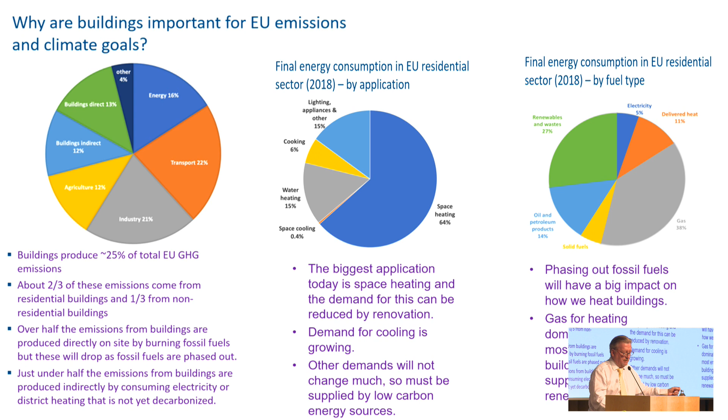But broadly speaking, there's a huge opportunity for reduction. That reduction can be readily met by electrification and particularly by the adoption of heat pumps and district heating. So there's wide opportunities to seriously address the emissions from buildings. Essentially, what it's trying to do is reduce the emissions from the building itself, decarbonise the building. That is by introducing measures that are going to reduce the heat loss, perhaps increase the solar gain, store some of the heat and electricity that's generated perhaps by solar panels, solar thermal, photovoltaic systems on the building, so that the building is able to reduce the amount of energy it consumes and export energy into district heating networks or to the grid.

So you're decarbonising at the demand side in the building itself. That also, by the way, requires a market that enables that demand side energy sales to be enacted. So your building occupants move from being consumers of energy to also producers of energy, so-called prosumers. And that's another side of it in terms of whether that market actually exists so that those transactions

can take place. The other thing that needs to happen is that the residual electricity to meet those heat pumps, for example, that comes to the building, is met from decarbonised sources, is met from renewable energy primarily, although if you regard nuclear as a decarbonised sustainable source, it could be met from nuclear. And

that needs to increase substantially, and actually needs to increase substantially over the amount of electricity in total that's currently generated. Because you're also seeking to decarbonise industry, you're seeking to decarbonise transport, so electric vehicles. So there's a lot of other demands on decarbonised electricity.

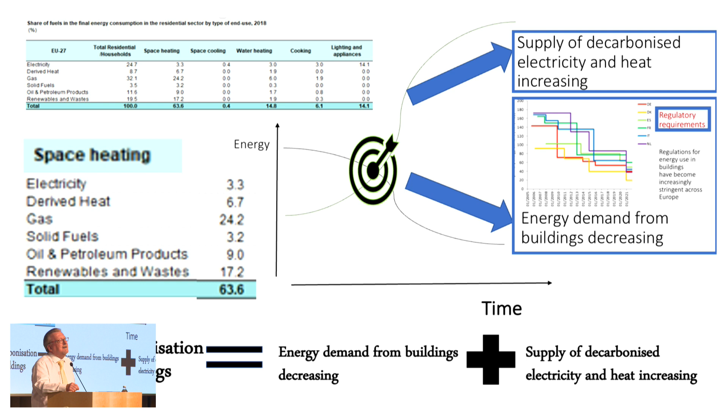side. Also, there tend to be, in many systems, entrenched actors who want to maintain their market positions, so that you discussed earlier on, for example, the people who maybe want to bring hydrogen into a domestic building situation. In my view, a completely mad idea. But the idea is because the gas industry saw the electricity industry became vectors for renewables and saw an opportunity for themselves to occupy a similar market position. So incumbent actors also influence the reality of how these things get played out.

So essentially, you'll reduce the energy demand, and you can see a little graph on my insert there of how actually building regulations for new buildings have gone down over the years and have tighter and tighter requirements, and supply decarbonised electricity, decarbonised heat from district heating to those buildings as the combined strategy that needs to be adopted.

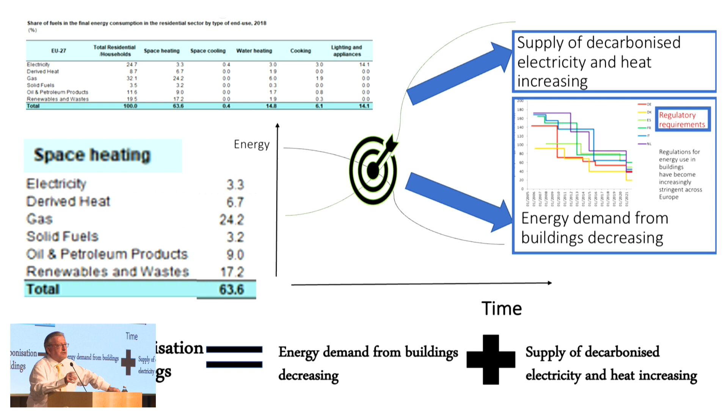And this is part of a long journey, and I'm grateful for this particular paper this year, a paper by Tirelli and Besana, which summarised, if you like, the trajectory of how things are going to change in buildings, and also some of the nomenclature, from business as usual to nearly zero energy buildings, zero energy buildings, net zero carbon buildings, carbon negative buildings, and absolute zero carbon buildings.

And I don't want to get tied up in all that terminology, but they're basically stages on a journey in which buildings move from being just supplied with energy to meet loads that aren't particularly controlled, to being net carbon sinks. And that is possible in certain climatic conditions in certain types of buildings. Not, I should stress, for individual buildings in all climates. So there's a kind of journey.

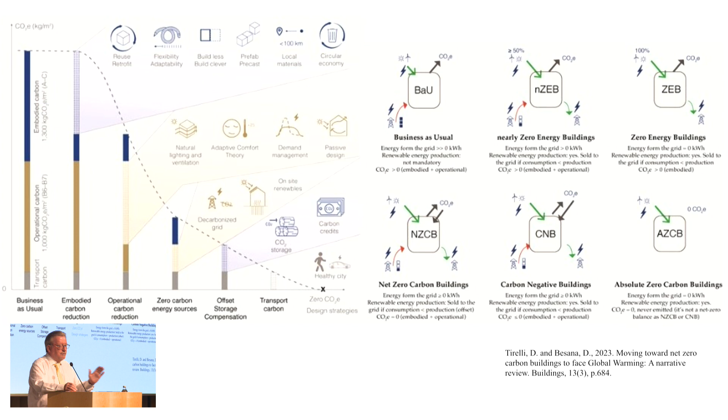So we look at just a little bit more detail at maybe the first stage of that journey, the net zero energy building. And this simply is a building which has reduced its energy load, but has solar thermal, PV. It may have a heat pump, for example, that can be part of a district heat network.

So when it is producing energy from the heat pump, but it's not being used in the building, it can go into that network. Or indeed, if it's a historic building, it may be actually drawing heat from a district heating network, which might have solar thermal, geothermal, heat pumps, etc., all linked to a network. So at certain times, it requires energy. At other times, it will be sending out energy to the grid.

The illustrations on this slide are terrific for me. These are new net zero energy buildings.

Is that achieving a low energy building is architecturally neutral. It doesn't imply any kind of architectural style or any architectural conceit that needs to be adopted. And all these buildings, quite different, are all net zero energy buildings, from very large scale domestic buildings using atria as glazed spaces to pre-ventilate air, to buildings that are doing a large amount around direct gain, storing solar heat from day to night, assuming primarily evening occupancy in a domestic setting, through to very, very traditional forms. So a whole range of different architectural forms emerge.

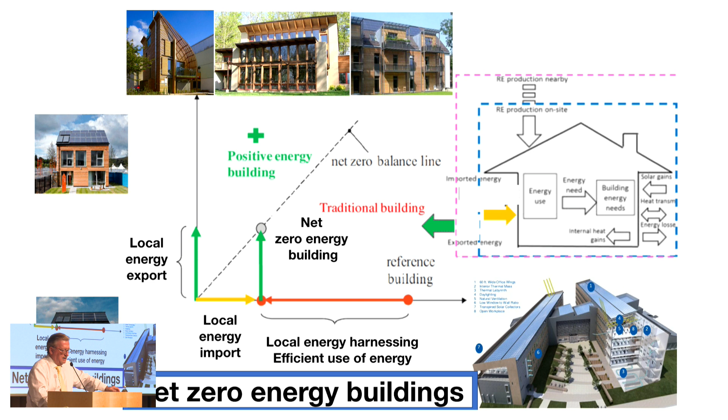However, this kind of conceptualization for a consumer is not very helpful. A net or near zero energy building is actually meaningless to a homeowner because, as Nevin said earlier on, primary energy for electricity is time and location dependent due to the mix of generators and can rapidly change depending on how much gas is used to generate electricity, how much renewables, etc. So your primary energy density is actually changing in a 5-minute interval almost, depending on the market structure, and is a primary driver of whether a building is net zero energy.

And also it allows things like installation of PV and the counting of exported PV to offset imported fossil fuels as somehow a decarbonisation strategy, and not actually deal with the intrinsic loads within the building itself. So one needs care in applying these kinds of metrics. And my view is that it is the actual energy cost in the building itself, the building fabric, the efficient use of energy within the building that needs to be measured and needs to be the objective of energy saving measures.

Otherwise, you can have perverse incentives to simply have PV on the roof, for example, which does nothing for the actual energy use in the building, or indeed simply encourage decarbonisation of the grid and have a lot of stranded assets producing electricity for winter heat peak loads, which are not needed the rest of the year, which have a net effect of increasing the overall cost of electricity to all consumers as a penalty for the few that don't decarbonise their buildings. So there's a complex set of interactions there.

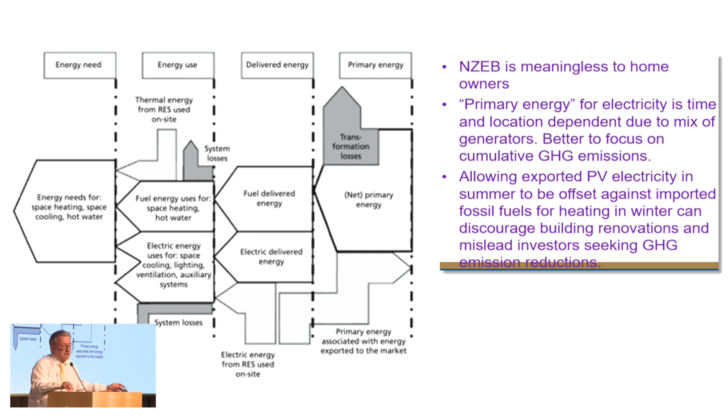This also, by the way, applies to new buildings primarily, and new buildings are relatively easy to decarbonise. You set a regulatory framework that requires below a certain energy use per square metre. You set regulatory frameworks that require a certain amount of renewable energy to be installed, may even require heat pumps, would certainly require that you don't install a gas boiler, etc. And that all achieves a lot within new buildings. However, the rate of new buildings is always small. Buildings within the past 2 or 3 years are rarely more than 2 or 3% of our building stock, and in a recession could be even less. So new houses are a minority.

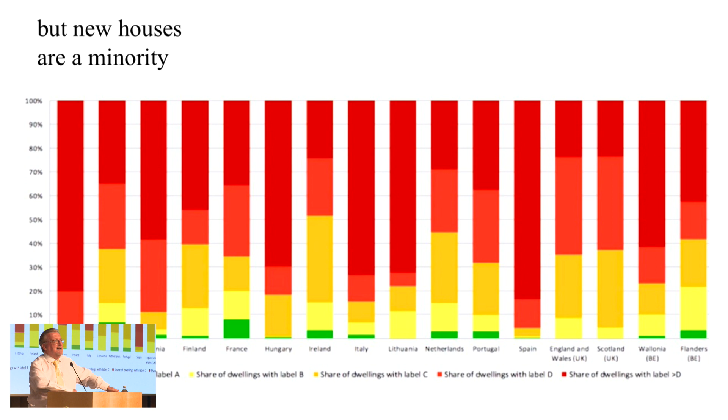And that leads you to this. Essentially this is a snapshot of Europe based on energy ratings. I'm going to talk about why this is not necessarily as good or as informative as it looks a little later on. But essentially the red here are the buildings that need refurbishment. And the little bit of green at the bottom is representative of the new building stock in these particular countries. So the real challenge with decarbonisation is not new buildings. That is met by regulation, by building standards, by a whole lot of measures. The real challenge is in the renovation of buildings and seeking to reduce the energy use in existing buildings. And there are multiple challenges in that respect.

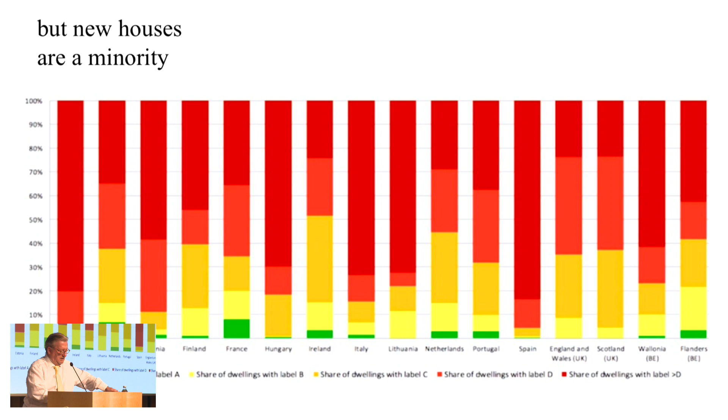So what that involves, and this particular example is of a social housing block in Estonia, before and after energy refurbishment, is improved insulation. How much depends on the particular country and the climatic context. Usually what's called a volumetric addition, which is that if you've got, as in this case, balconies, they're enclosed and made part of the building, so that there are other gains to the occupants. Draught proofing, reducing ventilation rates, very low heat loss windows, triple glazing, vacuum glazing, things like that come into play there. Renewable energy generation, so there'll be PV on the roof, etc. There might even be excess energy produced from a heat pump, which is essentially stored from summer to winter.

That would be going to other occupants within the building. So a whole range of measures. Okay, but it's not as simple as it might appear.

So, for example, if you look at the other picture I've got, which is a thermograph of a row of buildings, you might have several buildings that are refurbished, but one that is not. And this is because occupancy, ownership standards, tenancy, etc., comes into play here.

So, for example, if you have a landlord, the benefit of energy refurbishment accrues to the tenant, not to the landlord. So a social landlord that has many properties and has a social mission might refurbish all their properties. A private landlord may not, because it would not necessarily make economic sense to them unless there were the granted incentives to do so.

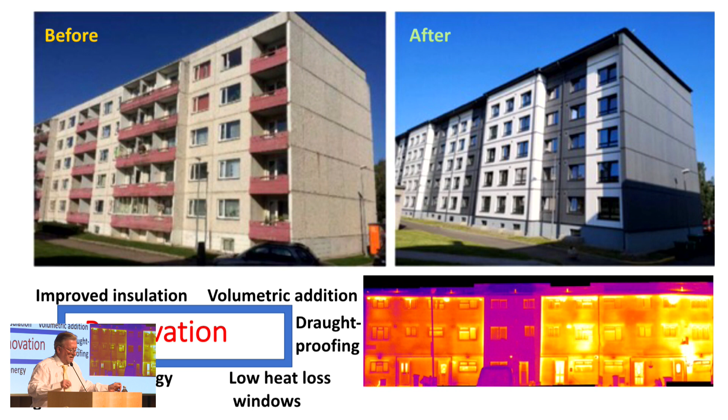And it's very difficult to devise regulations that either aren't too generous to people who don't need incentives, or can be gamed by people, or misdirected importantly. But it's important that actually it is done.

This, and I should explain, this is a calculation we did for the European Academies Science Advisory Council report, and there's a huge range of very hairy assumptions behind this. But the broad message, I think, is clear. What this is: if you looked at the effect when you work it through to global temperature rises of refurbishing buildings in Europe, and it assumes everything else remains constant, which of course it won't. But nevertheless, just as an illustrative exercise, it's quite interesting.

And if you had just business as usual, if you did not refurbish buildings, you did the decarbonisation of the supply system that's planned, etc., you'll completely overshoot any kind of target in terms of reducing global temperature rises.

Even with the current EU renovation wave, which is lagging behind where it actually should be, and there still remain a whole range of challenges, as I mentioned earlier on, by the economic capacity of various countries to support the kind of interventions needed to enable homeowners to refurbish their houses, even that is barely going to be able to achieve a 2 degrees Celsius temperature rise. And certainly the idea of a 1.5 degrees global temperature rise has gone out the window.

So if you relate these things to end targets in terms of global warming, and you've got a whole lot of intermediate stages of the actual emissions, how they're affected climate, etc., certainly the renovation of existing buildings is critically important.

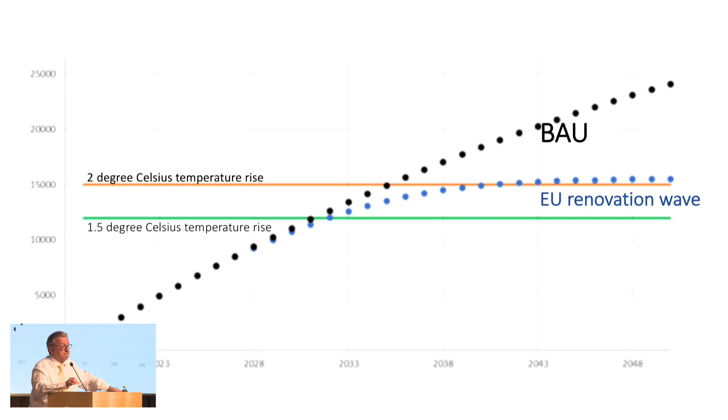Okay, I mentioned that I'd discuss some of the key challenges that there are in buildings. And one starts off with actually what do we know about energy use in buildings? And what might to some of you be surprising is that no country anywhere actually measures how much energy is used in buildings. Sounds surprising. So there's a whole lot of policy interventions to be made, and there's actually no evidence base whatsoever as to what the energy use in buildings actually is.

What they actually do is they use the energy ratings of buildings. And an energy rating is a calculation based on a standard set of assumptions to do with climate, occupancy, etc., that are then essentially modified to the particular physical characteristics of the building at a particular point in time. What is its heating system, how well insulated it is, what's its glazing system, floor area, those sort of things, to produce a rating.

And the original intention of ratings was as a means of offering government grants for refurbishment of buildings. Okay? So you're comparing, if you like, like with like, that this building by this method gets a better rating than this other building. And that's okay. As a comparative rating, it's fine. But then what's happened is the numbers associated with those ratings, and bear in mind the building is only rated when it's applying for a grant or when it's sold or rented, and when it's constructed.

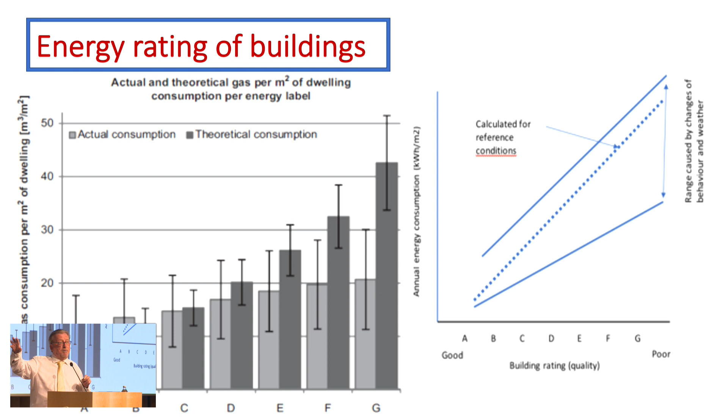Now, there's also, I should say, an awful lot of work on trying to improve rating systems so that they don't have this conflict between this idea of being a rating system and actually being used for national policy in terms of buildings. Another issue, and again it's been touched on already, is that buildings are part of a system, and looking at buildings in isolation can achieve a suboptimal system.

So you've got buildings that might have, for example, a PV prosumer, battery, there might in the future also be fuel cells in buildings, there'll be heat storage, etc. But there's a whole lot of other parts of the system where there'll also be storage with varying timelines and varying technologies. For example, a PV operator might actually have batteries at the PV field, at the PV generation point, so that they can achieve a better capacity factor to the grid by supplying stored electricity from their own batteries.

A grid may choose to have hydrogen. One of the potential applications of green hydrogen is, for example, in generation in the depths of winter and effectively storage for that. The other one, by the way, is decarbonisation of industry. But they may have hydrogen storage at the grid level as well. You might also have pumped storage. We do in Ireland, do in Wales, for example. So you've got pumped hydro. So there's a whole range of storage options within the grid.

And it leads to very critical questions about where you store. Is it at the demand side? Is it somewhere along that supply chain? What you store, is it electricity, is it heat, is it potential energy in hydropower? And why you're storing it, for what purpose. In other words, is it to discharge at the end of the day? Is it summer to winter?

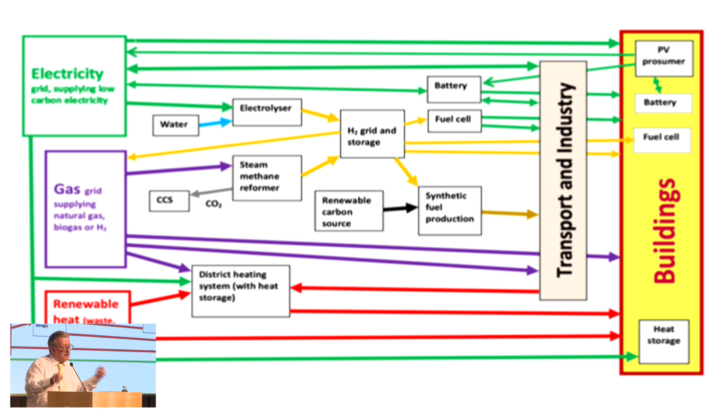Let's say a bit of a random walk here, but one other issue, and this actually came up very much in the COVID-19 pandemic, is indoor air quality. And this goes back to a point I made right at the beginning, in that the primary function of a building is not to save energy. The primary function of a building is to be a habitation, to be a lecture theatre, to be an operating theatre, to be whatever it is, and it needs to achieve that role perfectly. And one of the critical roles, particularly if you look at domestic buildings, is to provide a healthy, comfortable internal environment with the amenities that people wish.

Healthy and comfortable. And part of a drive toward low energy buildings was to reduce air change rates, reduce the ventilation rate in buildings, because you've essentially got a fabric heat loss and you've got a heat loss of that warm air being expelled from the building. That is not a good strategy, because it means you've then got a persistence of the pollutants in the air, again depending on the cooking culture, etc. But as particularly came true in the pandemic, also the ability to flush airborne pathogens out of the building is reduced if you've got very low air change rates.

So strategies in the future are going to be some combination of the preheating of ventilation air, either in non-domestic buildings through, for example, atria as a source of preheated ventilation air, or through double screen windows, etc., combined or separately with mechanical ventilation heat recovery, controlled by the air quality within the building. So accepting a higher air change rate, but then having an intrinsic energy conservation strategy around that, rather than simply reducing the air change rate itself, becomes important.

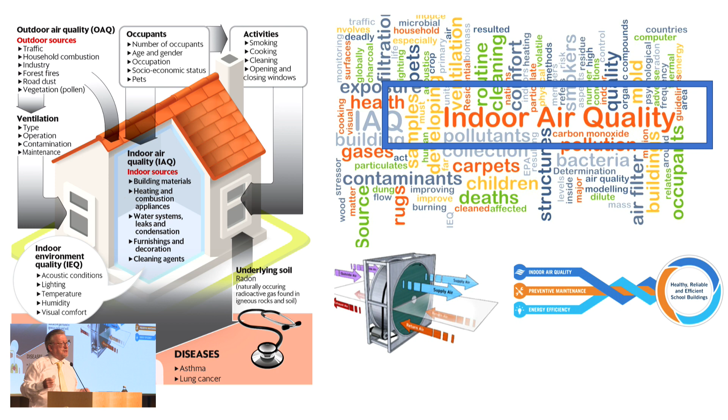So some of the measures that we were taking in the past in terms of very low air change rates are very unwise in terms of various aspects of human health, most of them discussed on that figure. A similar thing happened in terms of how buildings had windows. You see these trends where people are saying heavily insulated buildings, very, very small windows with lots of low energy lights, so that's a strategy. It's flawed for a whole range of reasons.

Over the last 15, 20 years, there have been a lot of discoveries about how the human eye interacts with the human circadian system, our body clock. And there was a discovery of a new type of cell within the eye, intrinsically photosensitive ganglion cells, which control the human body clock. And it responds to green, blue wavelengths that are particularly prevalent in the solar spectrum, and it's why we like to be in environments where there's lots of green around us, for example.

And traditional artificial lighting does not have those wavelengths in the spectrum. So from the point of view of providing circadian health, etc., with artificial lighting you might as well have been in a dark room. So having too much artificial lighting is bad for your health in terms of that process with the building. Also, for eye development in children, unless they get regular exposure to sunlight, you get short sightedness, myopia.

And so there are now so-called pandemics of myopia in places like Singapore, Taiwan, etc., where children move from indoor environments through underground passageways to indoor environments that are in shopping centres, etc., because of the climate, because of the hot weather, essentially, and never actually see the sun. They see a lot of artificial lighting. So a whole range of sort of adverse consequences of no daylight.

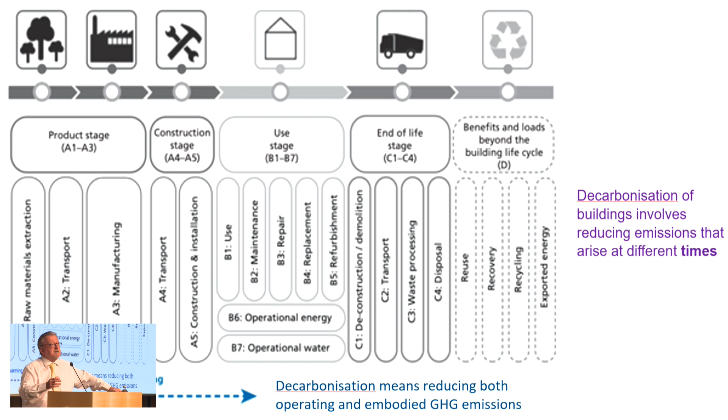And you see these kind of things of looking at energy over the life cycle, and you see these kind of ideas of a pyramid of materials, depending on how sustainable they are, with steel and concrete at the top, essentially, and wood at the bottom. Now, that's very simplistic because you can recycle steel, and you can increasingly see various versions of concrete that have low energy content. But nevertheless, a hierarchy there. But there is always an embodied energy associated with materials you put in buildings.

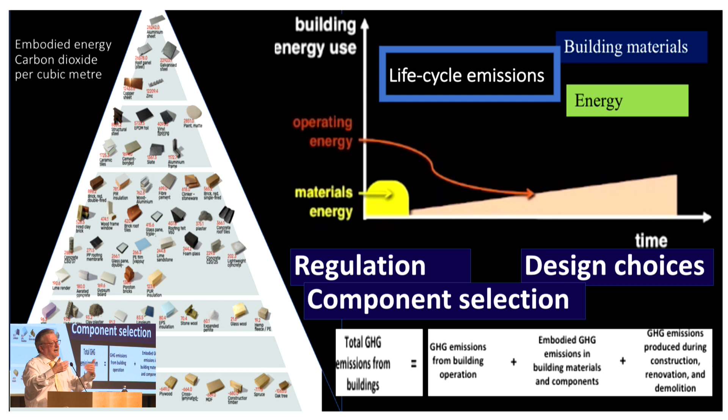This also applies to building refurbishment. So when you're refurbishing buildings, you're seeking to reduce the energy use, but in the very act of doing it, you're increasing the immediate energy embodied in that building. So there is a payback period over which your operation emissions need to be recovered. So this graph here, you see this line, that period of increase, you've actually got increased global warming, increased emissions because of the renovation. But the operational use is going down and eventually pays that back. And then you start saving energy overall.

But if your goal is to reduce CO2 emissions in the short term, you can't have that energy payback period for the embodied energy against the operational energy too long. It needs to be as short as possible. So again, looking at the embodied energy of materials becomes very, very important.

It also has an implication because the targets that government set for energy refurbishment have a cost optimum. So they're ending up moving from a rating E maybe to a rating B of some kind. But if you brought embodied energy into those calculations, and you also brought in calculations around what the actual energy use of an older building was, which I say is not often as much as you might think, the optimum calculations also change. And in fact, the net effect of all that is that the targets for refurbishing buildings should actually be very substantially increased. So, some big issues that come out of that.

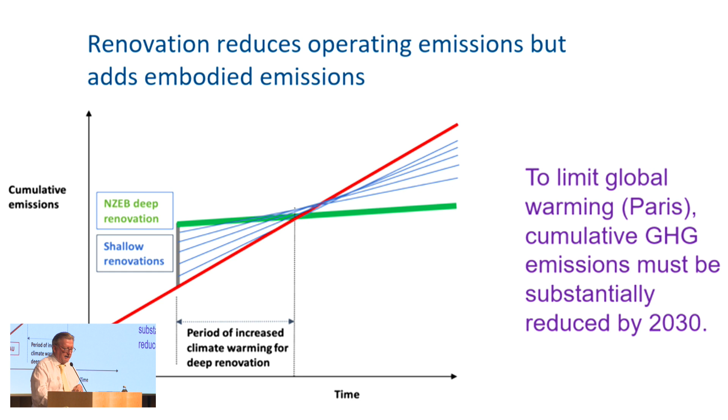I mentioned earlier on one of the big issues are the economic, social factors in this. And it's not my particular area of expertise, but I think it's important that it's included in the discussion because a lot of the barriers to energy efficiency in buildings are not technical.

They are market structure issues, they're social issues, they're financial issues of various kinds. So you see a whole range of new measures that are looking at affordable financing schemes that persuade building owners, whether they're landlords or literally building owners, occupant owners, to refurbish their buildings, and a wide variety of these things.

My own view is all of them need very strong market regulation, which is consumer-centered, and indeed even the people who do refurbishments, you increasingly look at one-stop refurbishment operations. Also, they need very, very strong market regulation. Otherwise, I think homeowners are going to be spending more money than they should do.

And one of the key issues, literally the elephant in the room on this, is fuel poverty. Fuel poverty is where the occupant of a building spends more than 10% of their disposable income on energy. And it has two factors. There's the energy cost in there, and there's the income of the home occupant. Energy costs have increased, but also because of recessionary pressures, incomes have decreased. So the number of people in fuel poverty has actually substantially increased and varies widely throughout Europe particularly.

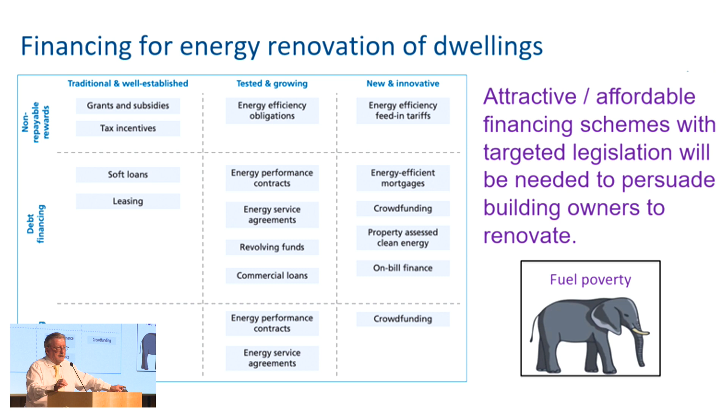Okay, to bring this to a conclusion, there are, in energy and decarbonisation of buildings, multiple different factors and actors. Architectural things, technical aspects, issues to do with climate that I've not really touched on this morning, a whole lot of economic factors, even planning factors, where buildings are located, where they're co-located, their access to solar radiation, for example, the sustainability of the transport network that serves them, all those kind of issues. So energy in buildings has a whole range of factors that influence it.

There are multiple benefits that accrue in terms of reducing CO2 emissions, in terms of quality of life for the occupants of buildings. Some of those are for the public good, some of those are private good, and there's a regulatory issue there as well. So things accrue differently to different stakeholders. I mentioned already what accrues maybe to a tenant as opposed to a landlord if you refurbish the building. But the holistic picture needs to be taken into account, and regulation needs to make sure that all those multiple benefits are, in each instance of policy decisions, carried through to maximum benefit overall.

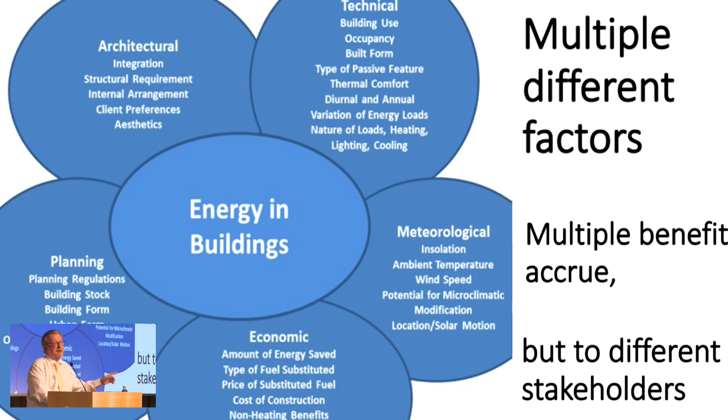And indeed, it needs a political philosophy that assumes that there are both public and private goods, and that's a politically contentious position. Okay, to summarize. There's no silver bullet. There's no one thing that decarbonises buildings. Certainly there needs to be a revised legislative framework, and we saw inclusion of, for example, domestic gas in the ETS would do some of that to get to near zero greenhouse gas emission buildings.

There is the need to completely phase out fossil fuels and supply renewable energy, decarbonised fuels into buildings. And again, that is obviously to do, but it's subject to pressure from incumbents. The very long lead times on replacing things that are being installed now, and indeed with certain kinds of installations where you might have a gas backup in a heat pump, for example, is that gas backup really still a gas boiler? Things like that.

Reduce the energy use of buildings, obviously, so lots of insulation, ventilation, heat recovery, highly insulated windows, draft proofing, etc. Looking to reduce the embodied CO2 emissions in building materials, components and systems, so decarbonisation of the steel sector, of the cement industry is critically important, and that will require replacement of feedstock, so more renewable electricity in steel production, probably hydrogen in cement production, and much greater efforts on waste heat recovery in the cement sector. There's huge opportunities there which have not been realised.

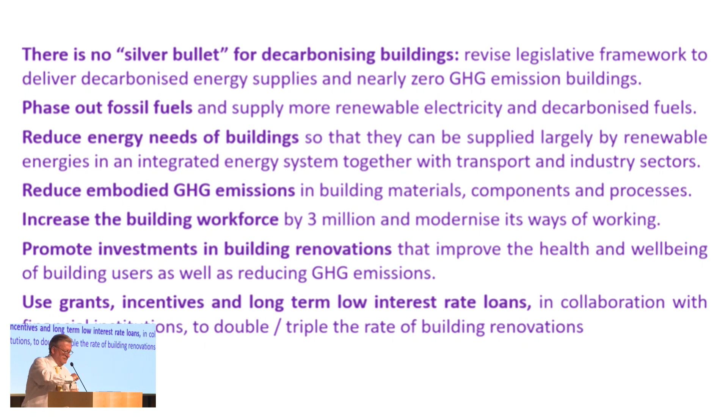Thank you, Brian, for finishing very quickly in time. Henrik, we need a microphone. A microphone is there. Okay.

Thank you very much for an excellent presentation where you really highlighted the many challenges of decarbonizing the buildings. I have been involved a lot in the district heating and district cooling technologies, and also in making Heat Roadmap Europe, the many studies for the past 10 years. And with that background, I was a little bit disappointed on your slides in the beginning, because you were always

talking about supplying the buildings with electricity and fuel, and you didn't mention heat and cooling from district heating and district cooling. Then in the middle of your presentation, I was very happy because I saw the word district heating for the first time. Then I was a little bit disappointed in the conclusion because you didn't mention it there.

So what I'm trying to say here is there is an emerging, for example, district cooling. There is an increasing number of district cooling in Europe now, and they have a very interesting role to play. When we are insulating the building so much, we also are increasing. Also in Scandinavian countries such as Denmark, Sweden, Finland, we have district cooling systems. They can make the electricity for cooling more efficient by a factor 10, sometimes even more.